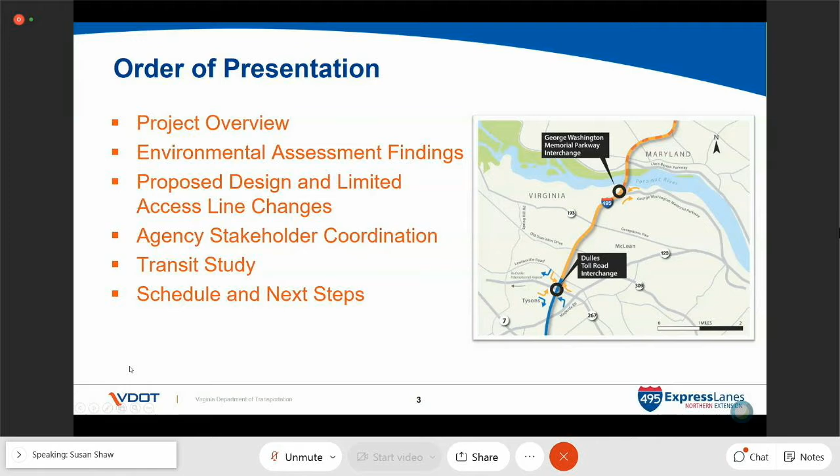The 495 Next project, as you can see from this project overview, involves extending the 495 express lanes to the north by about 3 miles from the current terminus near the Dulles Toll Road to the George Washington Memorial Parkway in the vicinity of the American Legion Bridge. The project includes replacing existing bridges at Live Oak Drive, Georgetown Pike, Old Dominion Drive, and I-495 North over the Dulles Toll Road.

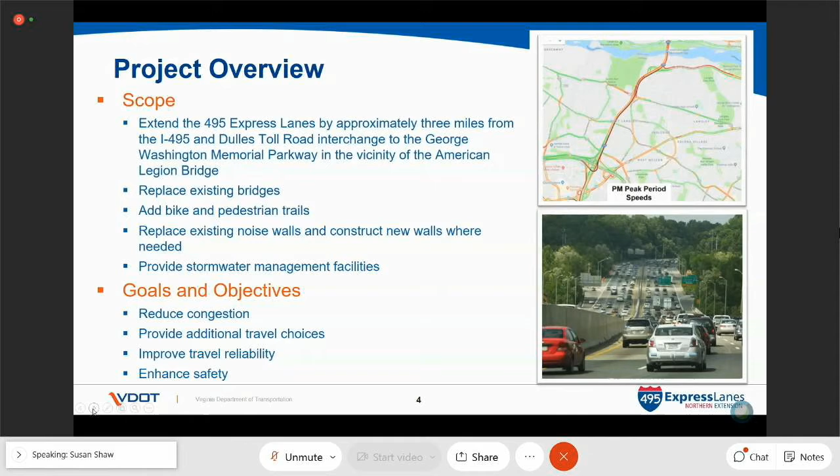It includes widening the I-495 bridge over Scotts Run and improving the George Washington Memorial Parkway bridges over 495. The project also includes building new bike and pedestrian paths along I-495 and on the new overpasses. Existing noise walls along the corridor will be replaced and extended, and new noise walls will be built if needed. In addition, stormwater management facilities will be provided to address water runoff from the project. The goals of the project are to reduce congestion on I-495 and nearby roadways, to provide additional travel choices on I-495, to improve travel reliability, and also to enhance safety in the project corridor.

Maryland is conducting its own project evaluating the addition of managed lanes on both I-495 and on I-270.

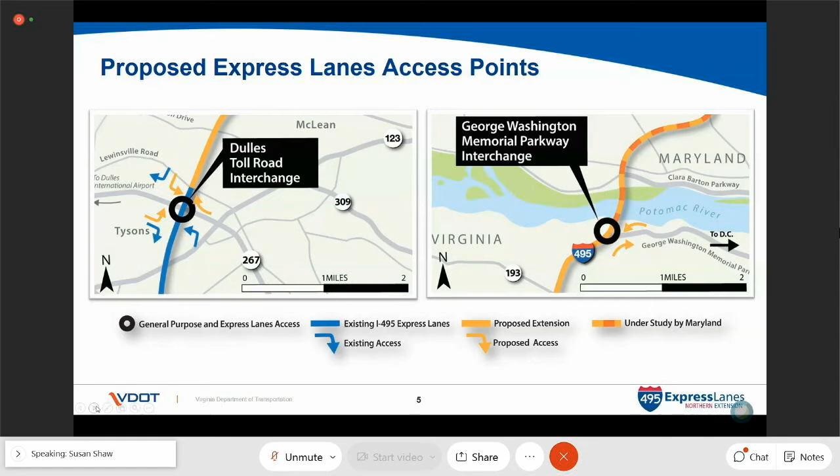On the next slide, we can see project benefits. The 495 project will improve travel on I-495 and along other roadways near the project corridor. The map shown here is a screen capture from an evening rush hour in May 2018 and is typical of roadway conditions during peak periods on what has been identified as the most congested segment of the interstate in the Washington area region.

The extended express lanes will help move more people through the I-495 corridor by adding new capacity and providing new travel choices with express lanes for carpools, buses, and toll-paying drivers. Additionally, drivers on I-495 will experience faster and more reliable travel times during peak periods. Improved travel on I-495 will benefit local roads as well by reducing cut-through traffic.

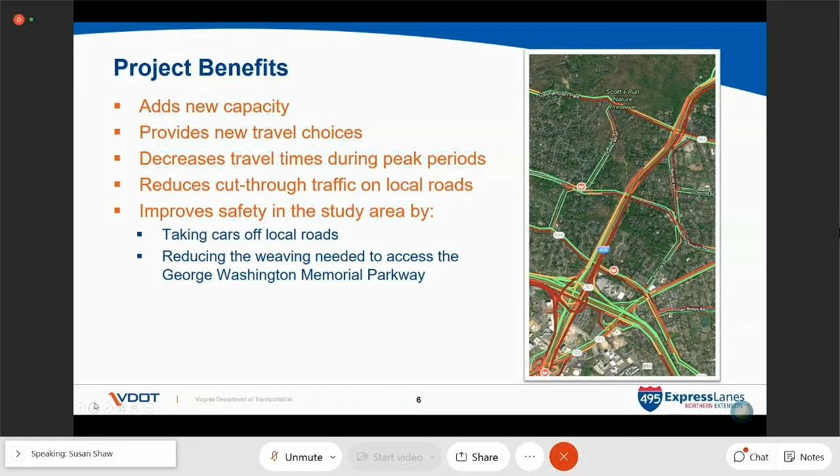The project will enhance safety both on and off I-495 with lower travel volumes on local roads and less traffic weaving on I-495 to access the GW Memorial Parkway. And now I'd like to turn it over to Abby Lerner, our project manager, who's going to go through some slides on our environmental process as well as our traffic analysis.

Abby? Thank you, Susan. VDOT is following the federally required process for evaluating environmental impacts for the project. The National Environmental Policy Act, sometimes called NEPA, requires that we consider the potential environmental consequences of the project, document the environmental analysis, and make the information available to the public for comment.

The purpose of our outreach and public hearing process is to provide information and receive comments and input on the proposed project and the findings of our environmental assessment. Information related to our environmental assessment has been available on our project website, 495northernextension.org, since February 26, 2020.

Are you on? You're trying to get on. Abby, please unmute yourself. I went ahead and muted everyone due to the background. VDOT is following the federally required process for evaluating environmental impacts for the project. Did I, okay. Do I need to do this slide again? Did that come through? We hear you well. We heard this slide. It's when you move to the next one about the technical studies. Oh, okay. Okay.

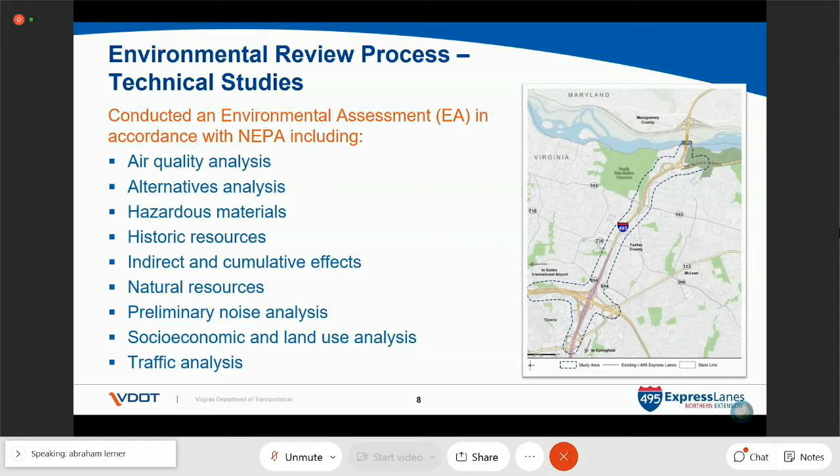As the project design was developed, the anticipated limits of disturbance, or LOD, which is a smaller area within the study area, was established. Potential project impacts to resources within the LOD were then quantified. The LOD represents the largest likely project footprint, and impacts within the LOD are reported in the environmental assessment and are shown in our design boards and the environmental document, which are available on the project website. As design progresses, the goal will be to minimize the project footprint further within the LOD. Next slide.

The George Washington Memorial Parkway, owned by the National Park Service, was identified as the only historic property within the LOD. The parkway is known for its landscape architecture and commemoration of George Washington, and consists of parks and trails totaling 7,600 acres. VDOT has been working with the National Park Service to minimize impacts to the parkway. Renderings of various options to mitigate impacts are shown in the George Washington Memorial Parkway visualization booklet, which is available on our website.

VDOT has also coordinated with the Fairfax County Park Authority on how best to minimize impact to its properties, the Scotts Run Nature Preserve, a 336-acre preserve located in McLean, north of Georgetown Pike and west of the I-495 corridor. Scotts Run Preserve is a publicly accessible recreational area. The 495 project would have minimal impacts on these two park properties, and VDOT has identified mitigation strategies for these impacts.

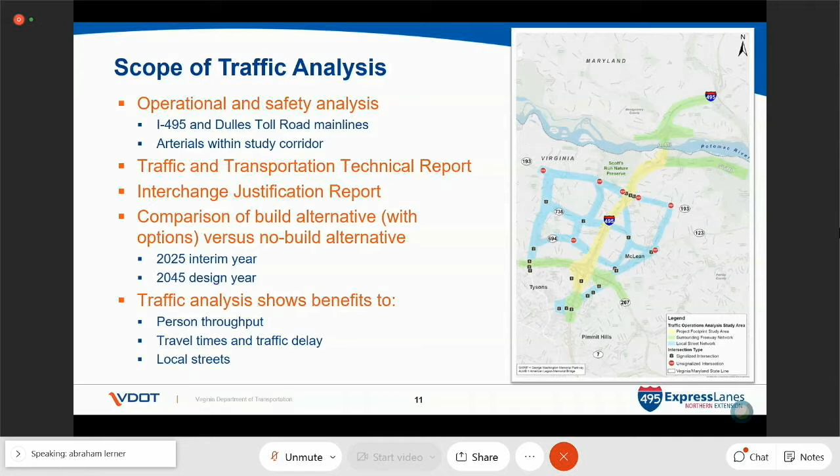VDOT's traffic analysis shows that the 495 NEXT project will move more people compared to existing conditions and compared to future conditions without the project. For the design year of 2045, the project is anticipated to move 7,600 more people per hour throughout the project study area in the northbound and southbound directions as compared to the 2045 no-build scenario. Similarly, in the interim year of 2025, the project would move 5,400 more people per hour than the no-build with Maryland's managed lanes project in place, and 2,500 more people per hour prior to Maryland's project being implemented.

The traffic analysis shows the Express Lanes 495 Northern Extension project will reduce cut-through traffic on local roads in all 3 scenarios that were analyzed. These 3 scenarios are 2025 with Maryland managed lanes, 2025 prior to Maryland managed lanes, and 2045 design year. In 2019, heavy congestion on I-495 resulted in travelers diverting onto parallel roads and local streets in the northbound and southbound directions. By increasing the person carrying capacity of I-495 and by providing a reliable travel option using the I-495 express lanes, drivers will have less incentive to use local cut-through routes.

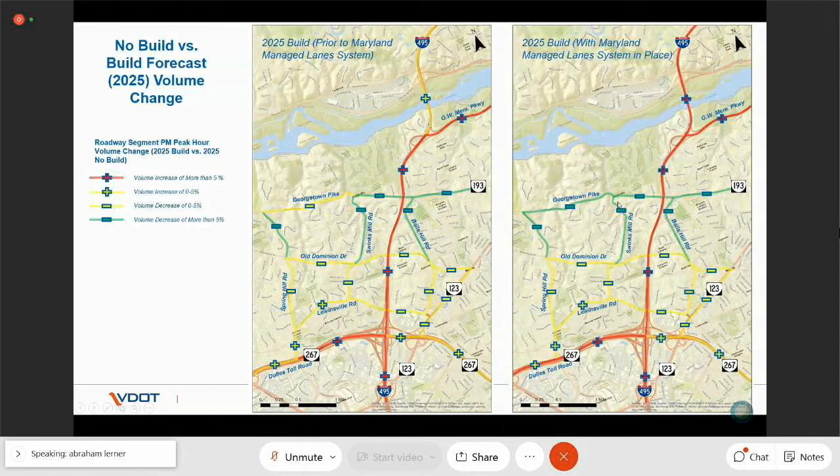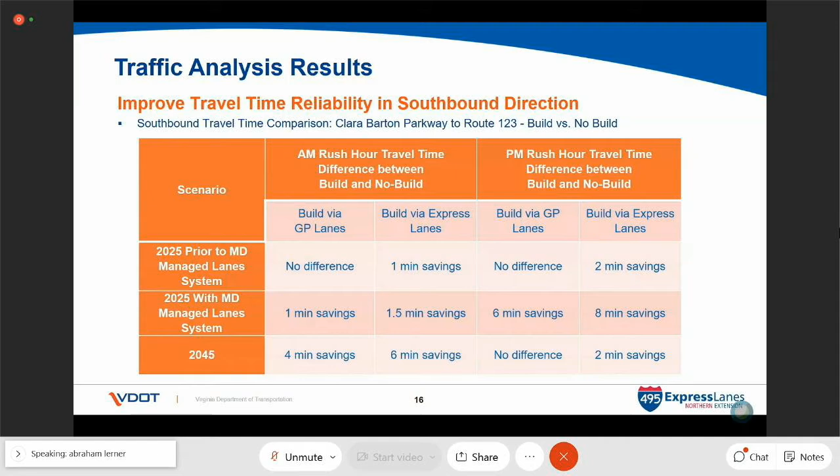The results of a safety analysis performed as a component of the traffic study indicate that the project improvements would reduce crashes by 20% in 2045. New direct access ramps to the I-495 express lanes at the Dulles Toll Road and at the George Washington Memorial Parkway would eliminate the need for drivers to cross four lanes of traffic in order to access the express lane entrance and exit points. Additionally, the proposed project includes design features that would improve safety, including longer acceleration and deceleration lanes, new auxiliary lanes, and widened and permanent use of shoulders.

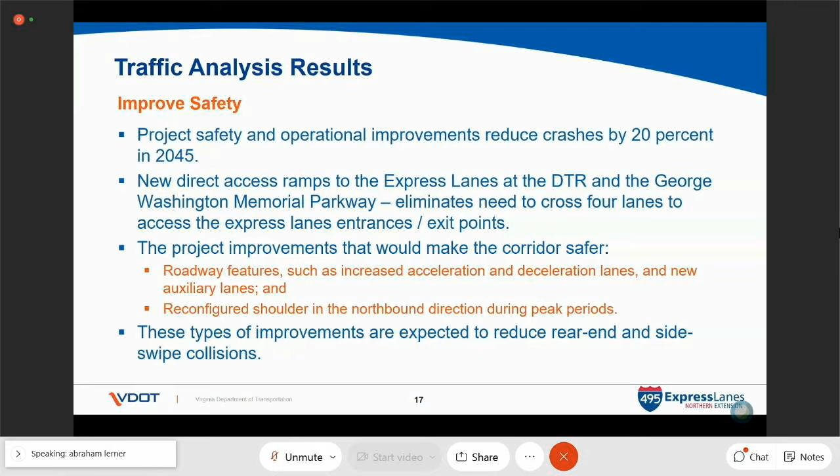VDOT is following federal and state policies for evaluating noise impacts associated with the project. Sensitive noise receptors were identified along the corridor, such as churches, recreational areas, and outside residential activity areas, and noise measurements were taken at sample locations. The noise data collected, along with terrain, was modeled, and noise impacts, including any properties within the 66 decibel range closest to the highway, and the properties anticipated to experience a noise increase as a result of the project, were identified. Then noise mitigation measures, or noise barriers, were inserted into the model to determine their effectiveness at reducing noise.

All of this is captured in a preliminary noise study. The study shows the preliminary locations where noise walls are warranted and have been determined to be reasonable and feasible. As the project advances, a final noise abatement design report will be produced. Owners and renters of all properties that would benefit from potential new noise barriers will be identified in the detailed report, which will be available on our project website.

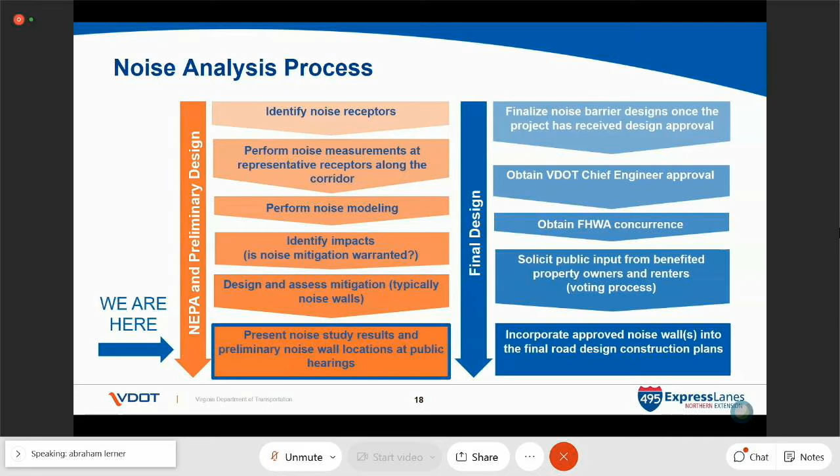The results of our preliminary noise study indicate that 3 of the existing noise walls may be lengthened. Some examples, shown in blue lines on these figures, are near the Live Oak Drive overpass and the George Washington Memorial Parkway interchange. One potential new wall was identified along Live Oak Drive in the vicinity of the George Washington Memorial Parkway interchange. Properties along the corridor that are protected by a noise wall today will have a noise wall in the future.

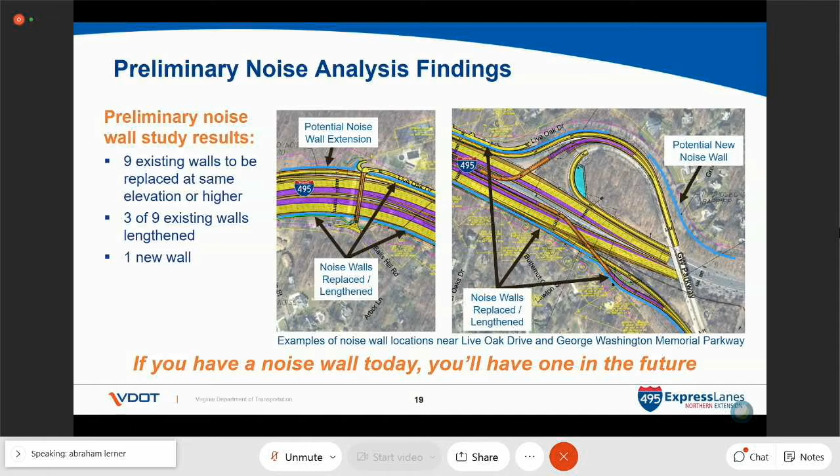Our team has developed a preliminary design of the proposed improvements. This level of design is more robust than is typical at this stage of a NEPA study and provides a better understanding of the environmental impacts and benefits of the project. Preliminary engineering for 495 NEXT includes the design of highway widening, ramp connections and interchanges, pedestrian and bicycle facilities, and replacement of 4 bridges, as well as drainage and stormwater management concepts. As part of these efforts, we have identified preliminary anticipated impacts to adjacent properties and necessary changes to limited access lines, as well as developed an overall cost estimate and a project schedule.

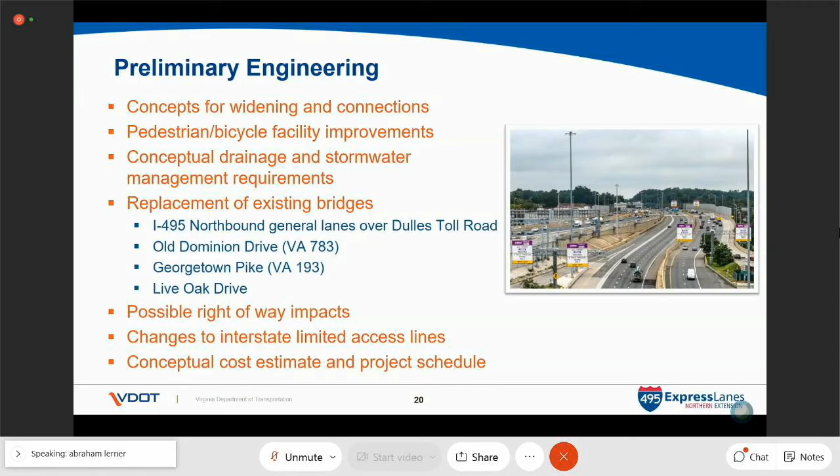As part of the 495 NEXT project, VDOT has collaborated with the Fairfax County Department of Transportation and the Fairfax County Park Authority to include a shared use path parallel to I-495 and connections across I-495 for bicycles and pedestrians. The proposed shared use path, which is a key element of the countywide trails plan, would be located parallel to I-495 between Lewinsville Road and Live Oak Drive. Reconstructed bridges over I-495 would include sidewalks and shared use paths to improve bicycle and pedestrian connections. VDOT is coordinating with the Maryland Department of Transportation to provide a future extension connecting the 495 NEXT shared use path to future bicycle and pedestrian facilities on the American Legion Bridge and to points further north.

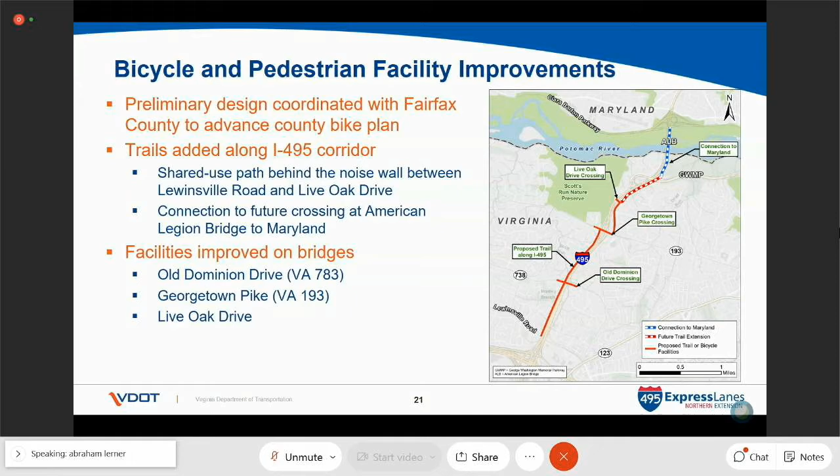The existing 495 corridor includes 4 general purpose lanes in each direction, separated by a concrete barrier in the middle, with a 10 to 12 foot shoulder southbound and a 6 foot wide right shoulder and a 13.5 foot wide left shoulder northbound. The left shoulder on northbound I-495 is currently used in the peak periods as an additional travel lane. The typical section for the future widened I-495 includes 2 express lanes in each direction with left side shoulders, 4 general purpose lanes in each direction, and wider right side shoulders.

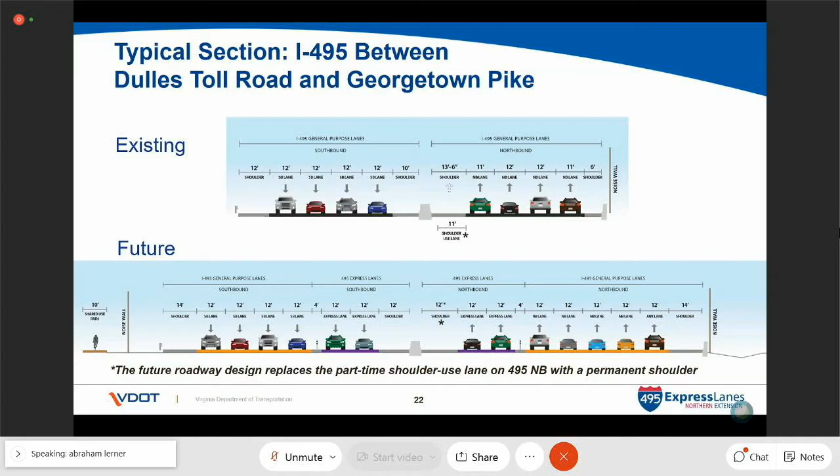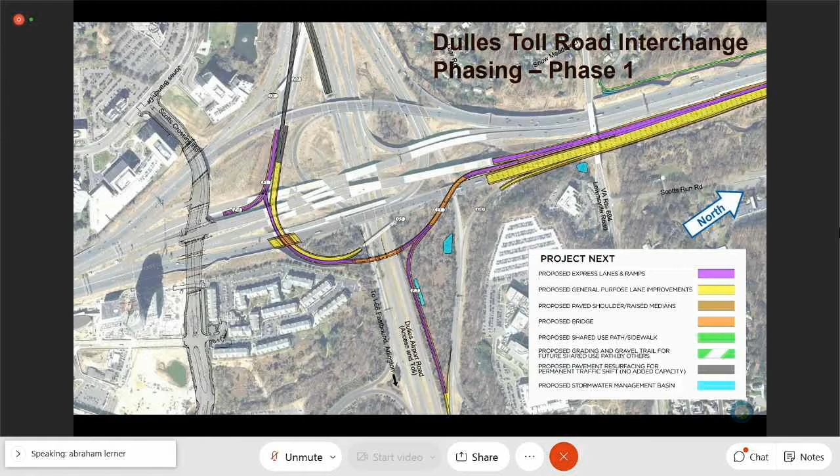These connections include new direct access from the southbound 495 express lanes to the eastbound Dulles Connector Road with connectivity to I-66 inside the Beltway, and new connections to and from the Dulles Airport Access Road for the I-495 general purpose lanes and the I-495 express lanes.

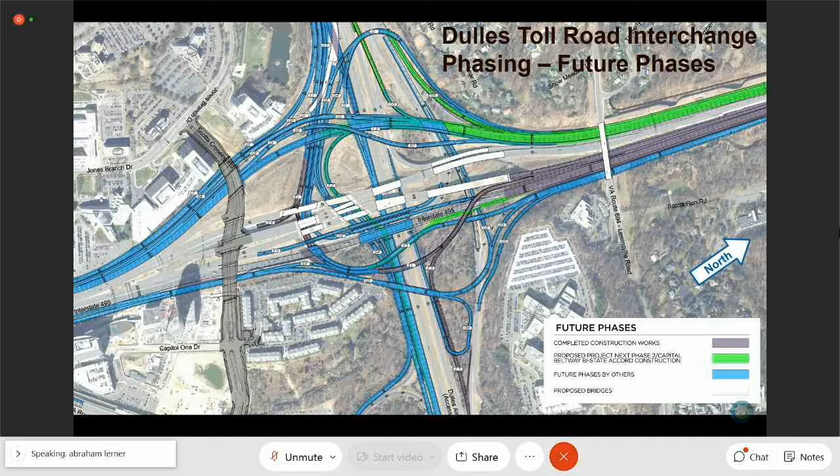At the George Washington Memorial Parkway interchange, Phase 1 of the I-495 Next project includes new direct connections to and from the south for the proposed 495 express lanes. The project design allows for future connections to and from the north for Maryland's proposed managed lanes. Prior to the opening of Maryland's project, the 495 project northbound express lanes would merge into the general purpose lanes in the vicinity of the George Washington Memorial Parkway.

In the southbound direction, entrance to the express lanes would begin from a single lane on the left side of the general lanes and would then expand to two lanes, similar to the existing I-495 express lane southbound entrance near Lewinsville Road. The current express lanes entrance near Lewinsville Road would be eliminated.

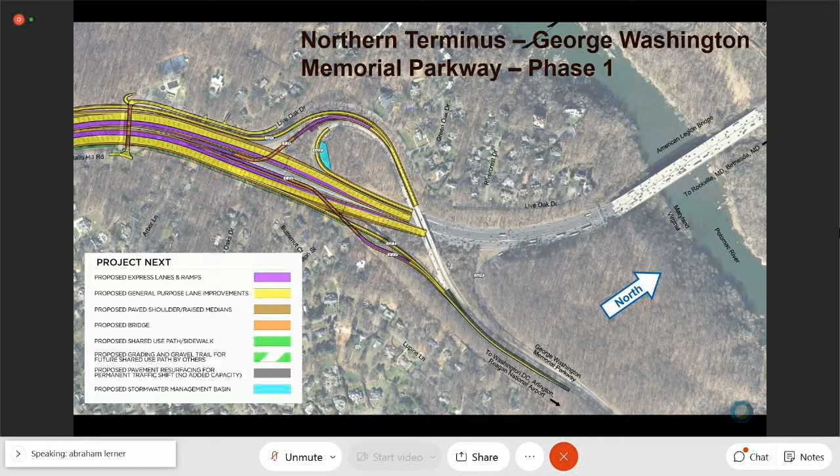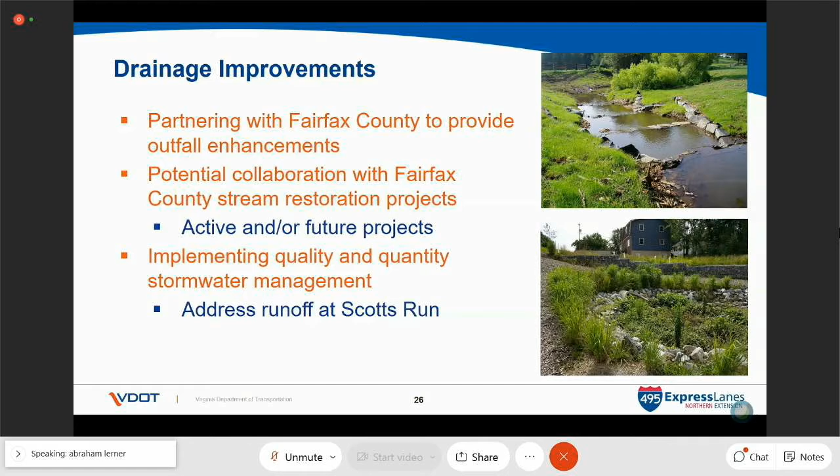Okay, thank you, Abe. I'm going to continue with our presentation here in just a moment. So one of the things that we wanted to talk about are the number of agency stakeholder coordination efforts that we've been going through on this project. Throughout our project's development process, we have been coordinating with both local partners in Fairfax County, as well as our regional partners, state agencies, as well as federal agencies. These agencies have participated in regular workshops and briefings, as well as one-on-one coordination meetings.

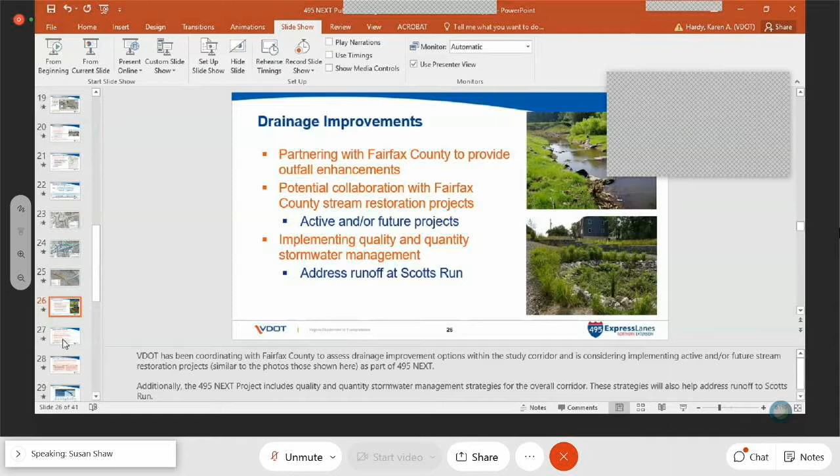The 495 Next project is planned to be designed and constructed in accordance with all of the required agency standards, permit conditions, and regulations where required by the stakeholder agencies. In just a minute, we're going to put our slide presentation back up, where we will be able to see that list, but I'll just read through some of them. So Fairfax County Department of Transportation, Fairfax County Park Authority, our Federal Highway Administration, Maryland Department of Transportation. We've also worked with our Metropolitan Washington Airports Authority, our Council of Governments, the National Park Service, Northern Virginia Transportation Authority, and here you see the list here.

And so with that, I'll move to the next slide to talk about our project delivery partnership. Capital Beltway Express, which is a subsidiary of Transurban, is the current operator of the 495 express lanes. In January of 2019, VDOT and Transurban entered into a draft framework agreement to work towards amending the current comprehensive agreement to extend the existing 495 express lanes. Under the draft agreement, Transurban, in close coordination with VDOT, is developing preliminary design plans to support the environmental assessment, as well as additional independent studies to support the project's design. VDOT reviews and approves this work as it is developed.

After the required environmental regulatory approvals for the 495 Next project are received, Transurban would then submit a binding proposal to VDOT to finalize the design and to construct the project with no public funding from the Commonwealth. Transurban would then operate and maintain the 495 express lanes extension, just as they operate and maintain the existing system out there today. VDOT will continue to be responsible for regulatory approvals, for project oversight, and for agency coordination.

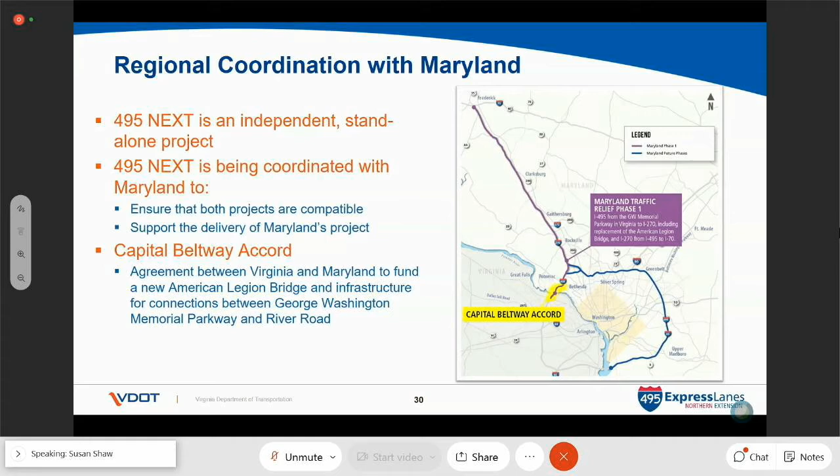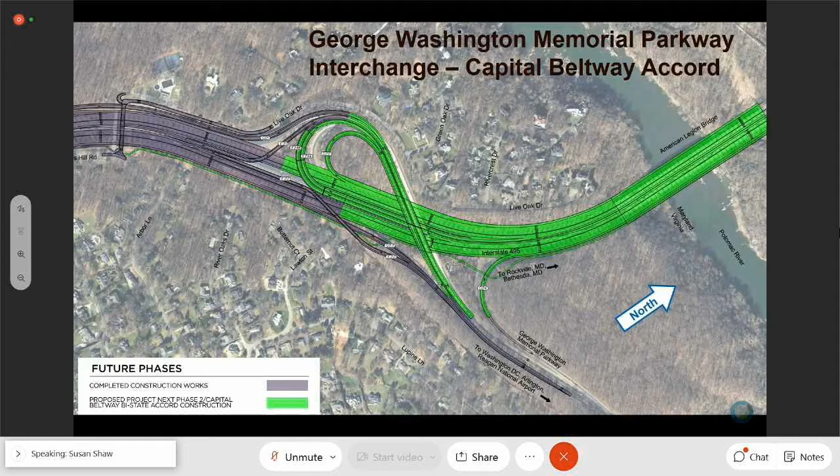Another study being done outside of our project is a regional transit study. This new regional transit study is underway to assess transit needs along the I-495 corridor in Virginia and Maryland. It's being performed jointly by the Virginia Department of Rail and Public Transportation and the Maryland Transit Administration, and is being conducted in parallel to the current studies and design efforts underway as part of our project for 495 Next. Results of this transit study are anticipated later in 2020.